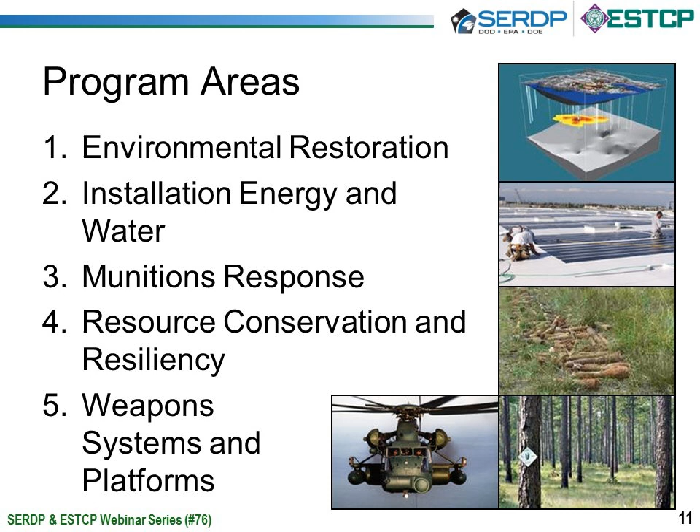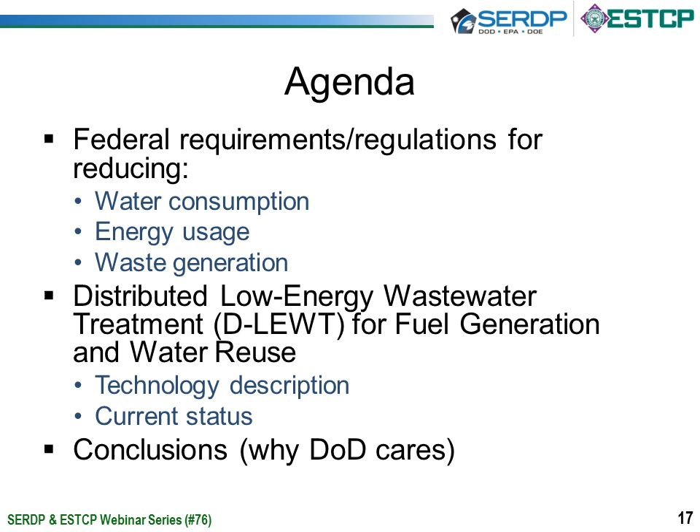However, this year, on slide 20, it was replaced with a new executive order. This new order removes a lot of the actual numerical goals, but makes it more flexible for individual agencies and installations to set their own programs to figure out how to accomplish the reduction in energy, water, and waste.

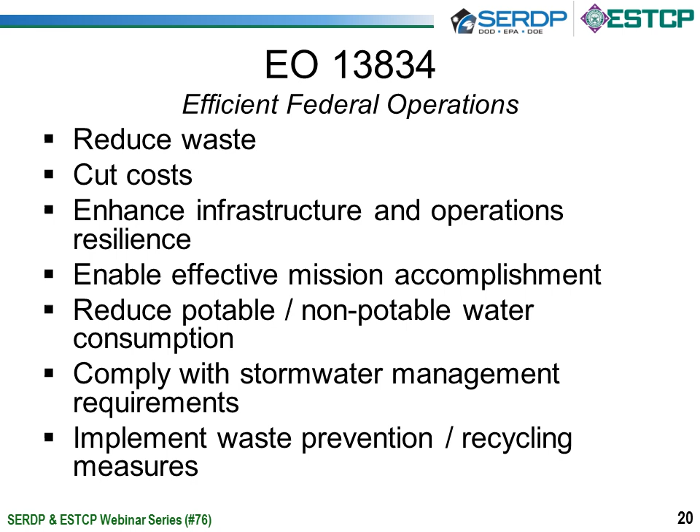On slide 21, moving into some of the Army directives. The Army directive for net zero installations addresses energy, water, and waste, focusing on reducing all of them as much as possible. One way to address energy is through renewable sources like solar and other electrical generation, but also by implementing energy recovery. A lot of focus has been on waste heat from generators, trying to use that instead of reheating water from baseline.

Water efficient technology is about reducing the amount of water used, and also about finding ways to reuse water—how can we send water from potable use, use it once, and recycle it, whether for a lower-tier use or to bring it back up to potable standard.

And then on the waste side, reducing solid waste, but also can we use the solid waste as a resource? Can we generate energy from it? Or can we turn it into another product? This way it doesn't go to the landfill.

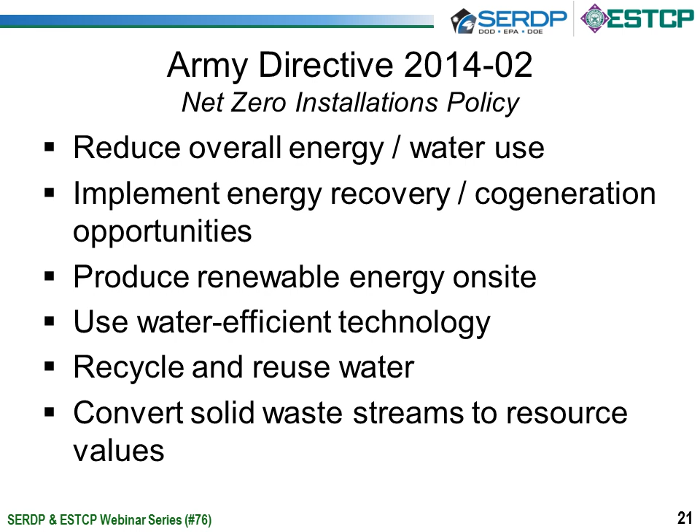In addition, for all missions and on a daily basis, the Army Directive moves the Army to having assured access to a resource, whether it's energy or water, by maintaining multiple sources, using sources that aren't typically thought of as a water source, going to more renewable energy, things that can be generated on site, and also looking at reliable infrastructure condition, maintaining what we have, fixing what's broken, and putting on-site energy and water storage, batteries, water tanks that are within the fence line so we're not dependent on the surrounding community.

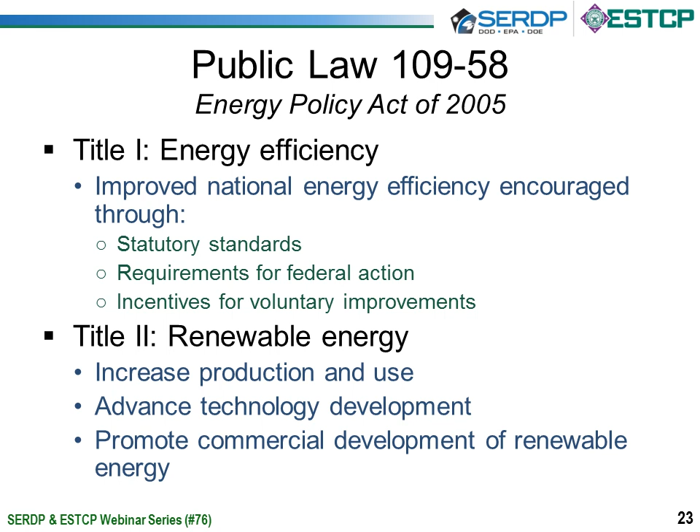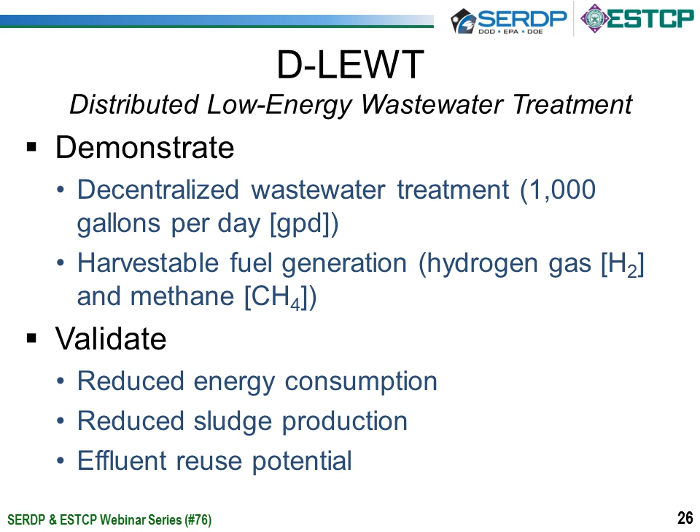On slide 27 is a pictorial representation of what I just discussed. On the left side, we have 1,000 gallons per day coming into the D-LEWT system, shipping container box. The up arrows represent the methane and hydrogen fuels that are generated. Out the right side, the effluent is water that's available for reuse. And we can take the harvestable fuels and put it back into the D-LEWT system to increase the energy efficient operation.

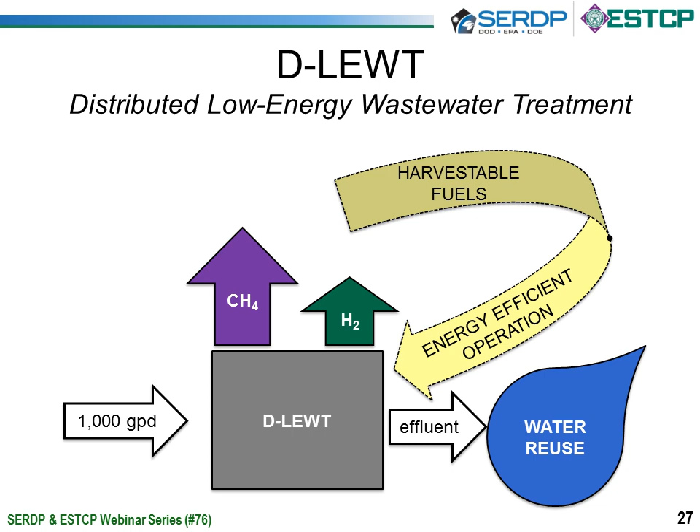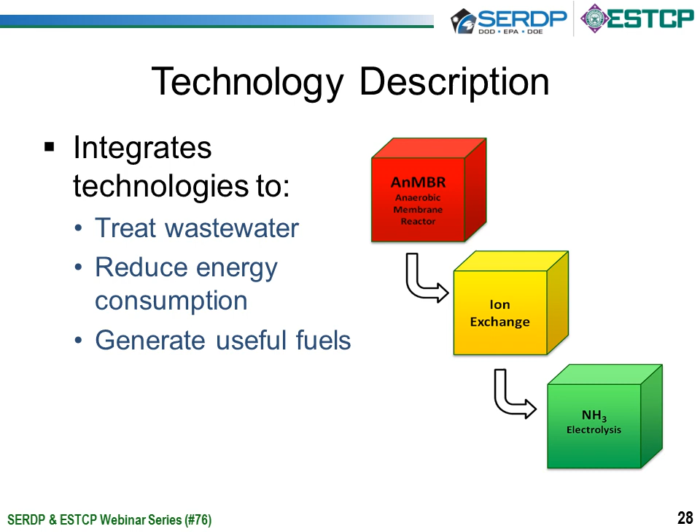On slide 29, I have a more detailed schematic of the D-LEWT system. If we walk from left to right, wastewater comes in, again goes to the AnMBR system. In here, during our project, we're going to be monitoring the volume and composition of methane gas produced.

From there, we go to clinoptilolite. Again, this is going to be to capture the ammonia. Once the water has gone through the clinoptilolite, it comes out as the effluent, the treated water, and is available for reuse. The clinoptilolite is then coupled with ammonia electrolysis for regeneration of the mineral to remove the ammonia, sending the ammonia to ammonia electrolysis on the far right.

The ammonia electrolysis cells break the ammonia into hydrogen and nitrogen gas. So nitrogen gas is our byproduct here, which being a major component of the atmosphere, it's safe to release. We keep the regenerant solution in a closed loop between the clinoptilolite and the ammonia electrolysis cells, so the regenerant doesn't become a waste product in our system.

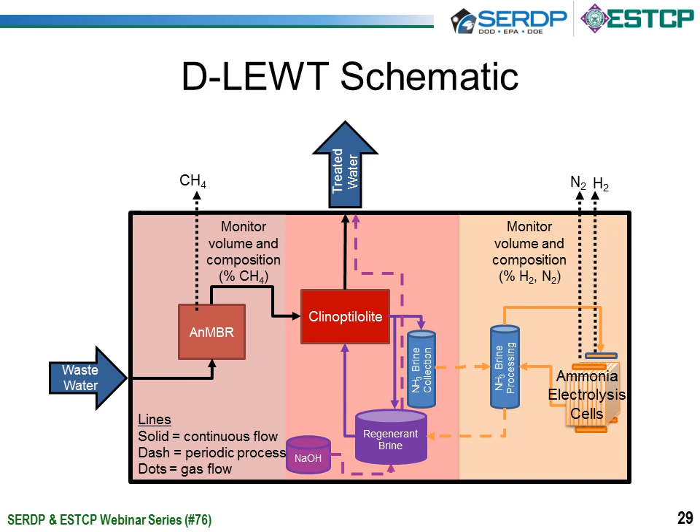On slide 30, the current status of the anaerobic membrane bioreactor. We were really lucky with some partners at the University of Illinois. They had the system available and they were willing to let us use it for the project. They've updated the controls and added a new membrane. At this point, we're ready for integration to the total D-LEWT system, pending some contract negotiations and actually getting the system built.

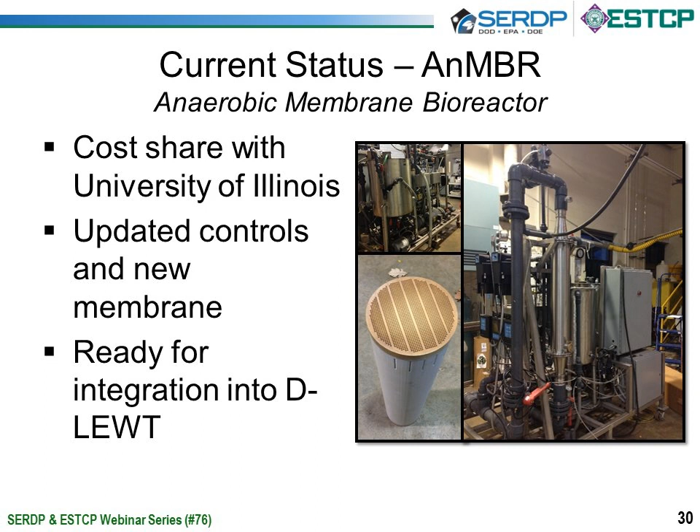On slide 31, the second step of the system is a clinoptilolite ion exchange. As I mentioned before, clinoptilolite is a naturally occurring mineral. It's mined in the U.S. and across the world. The system is nearly complete. We sent it out for an engineering firm to build it for us. We have 4 columns, similar to the one shown at the very bottom, made of clear PVC pipe. This way we can see what's going on in them.

One of the big advances is actually putting an autonomous operation in for valve positioning and timing. Currently, for the lab model, we have to have a student in there flipping switches. But for deployable operation, that's not going to work. So we're really excited to have this autonomous operation and control system.

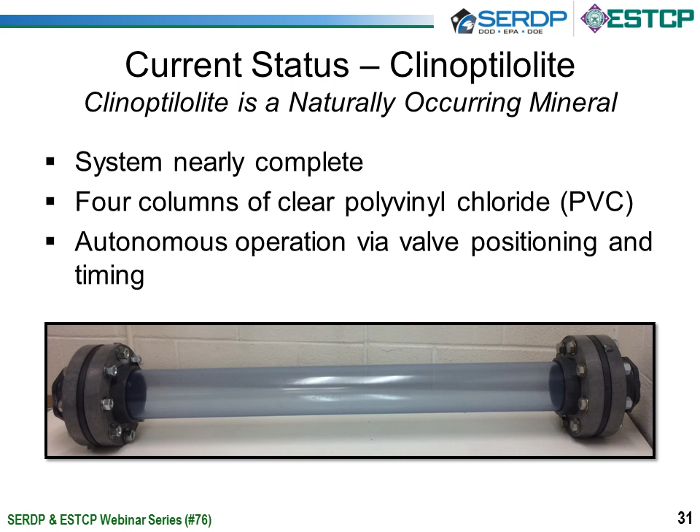On slide 32, I show a picture here of what some of the electrolysis cells look like. Between 2 of these plastic plates, there's a water-permeable membrane with catalyst on it, and that catalyst, when voltage is applied, does the work of breaking the ammonia into nitrogen and hydrogen gas. We've obtained an additional 12 cells from Ohio University. They hold a patent on this technology, and so far the only ones who are making these cells. And this portion of the D-LEWT system is also awaiting integration into the complete system.

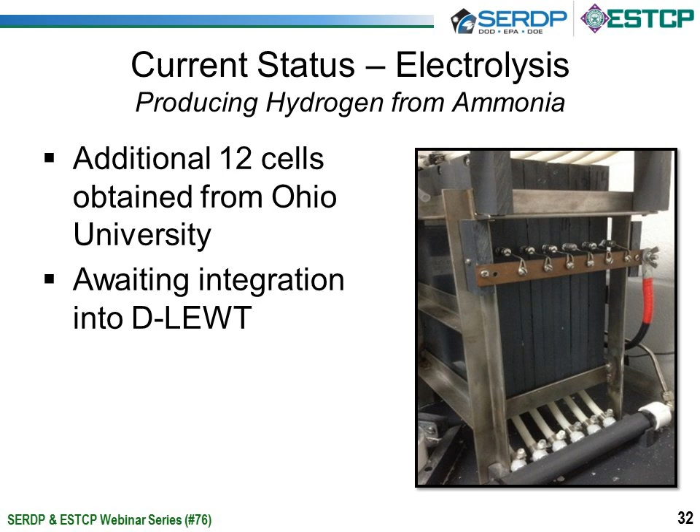Slide 33 shows where we're headed in the future. Hopefully early next year we will have our system complete and ready for deployment to Mountain Home Air Force Base. Mountain Home has been great to work with. They have a headworks building that's going to be perfect for our project. There's a grinder and pumping station right there.

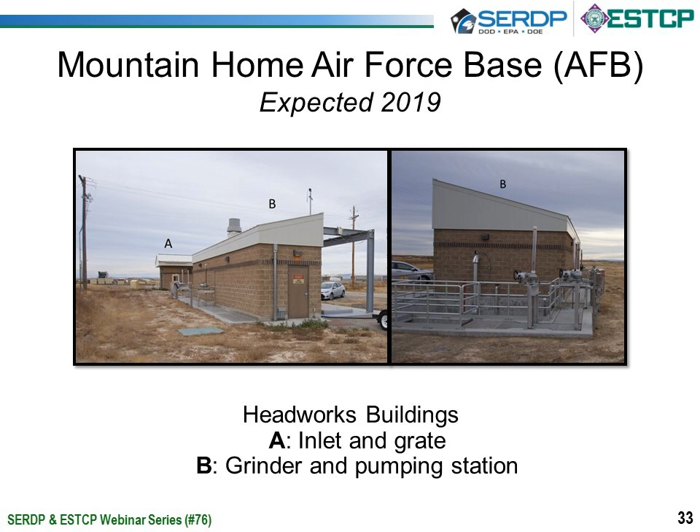On slide 34, one of the nice things about this is that we have access to an open channel from which to draw the wastewater. It's going to be post-grinder, so it'll be great to send into our anaerobic digester. We can also situate the system so we can return our effluent, the water coming out of our system, right back into Mountain Home's wastewater treatment.

This is great in case of system failure or malfunction, that we're not creating a public safety hazard. The water is going to still be treated through a standard wastewater treatment plant. And this is not going to cause a problem for them because we're not drawing enough water to impact their wastewater treatment process.

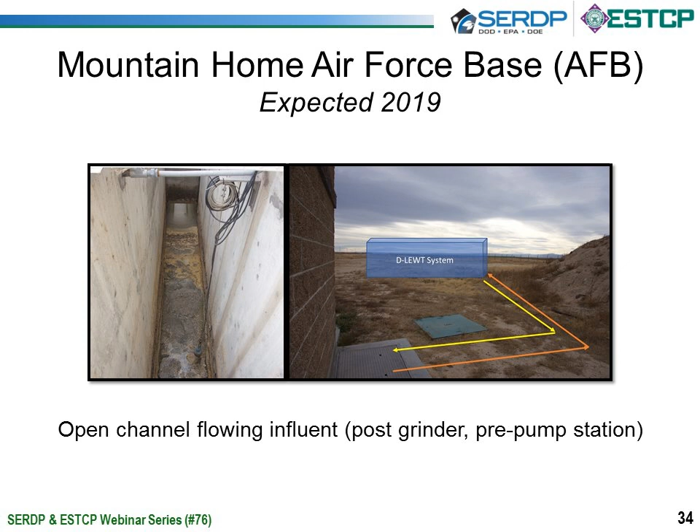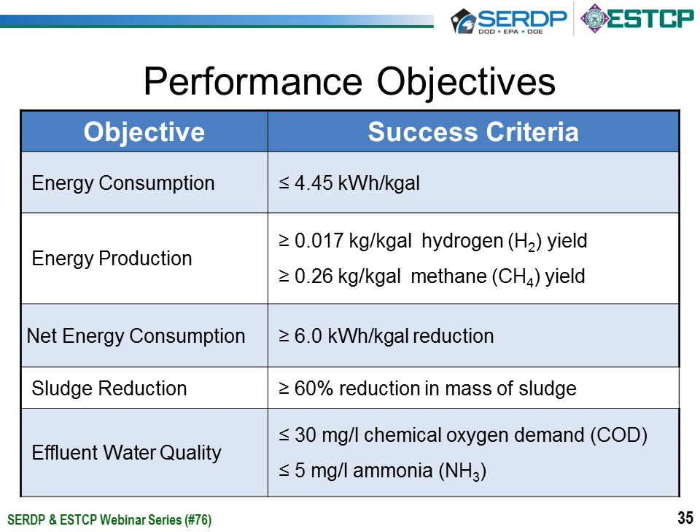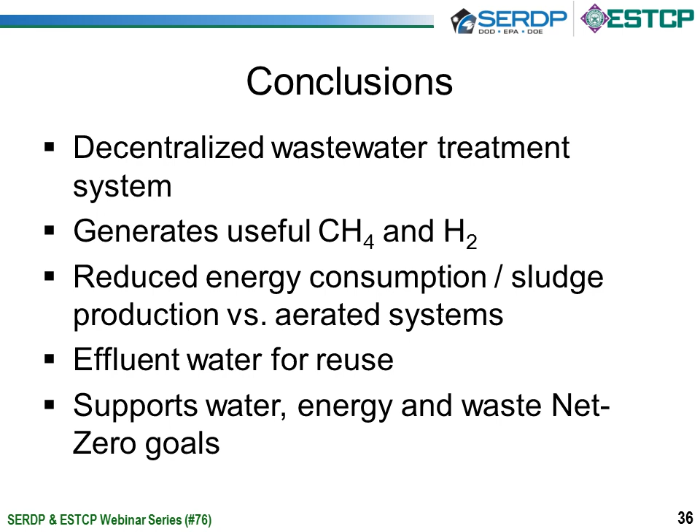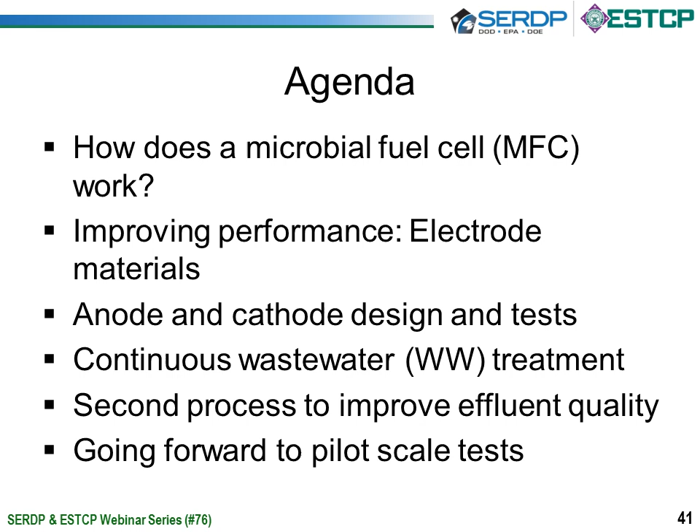So we're going to start off by talking about how a microbial fuel cell works, talk about some of the components in the microbial fuel cell and how we've researched those to determine the basis for optimizing them and being able to design and eventually manufacture them. Then getting into continuous wastewater treatment and whether we can meet our regulatory goals for treatment of wastewater and discharge. We'll talk about some secondary polishing processes, and finally get into pilot scale testing and where we're going with that.

First, a microbial fuel cell is analogous to a regular fuel cell, with the exception that we have a biological component in it. One of the components is the anode, shown right here, and we have a biofilm of bacteria that grows on this anode. At this anode, what is happening is the fuel in the wastewater situation, which is organic carbon, is being oxidized to products including carbon dioxide. When that oxidation occurs, it releases electrons.

Those electrons can then go through a load. For example, it could be used for trickle charging of batteries, cell phones, or packs on troops. From there, the electrons, of course, need to go somewhere, and they go to the cathode, just as in a regular fuel cell. In this cathode, the oxidant is oxygen, and it is reduced into water. We see here a little cube-type microbial fuel cell with the cathode shown right here. This one was developed in Bruce Logan's laboratory at Pennsylvania State University. He's the principal investigator on this project.

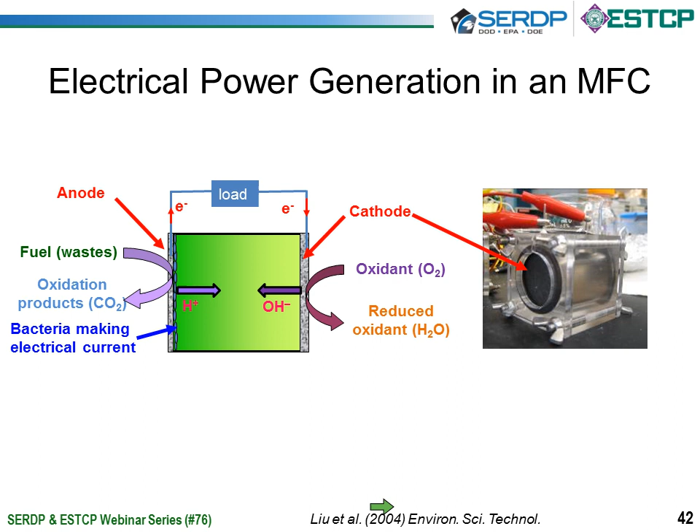So in looking at the microbial fuel cells, we looked at a number of different components. One is the anode, shown here. We need to determine how many of them we need, what size, what orientation. We also looked at the cathode, shown in red here. And then a couple other components: there's an item called the separator, which is between the anode and the cathode. The purpose of that is to protect the cathode, so we'll talk about that a little bit. And then there's a spacer.

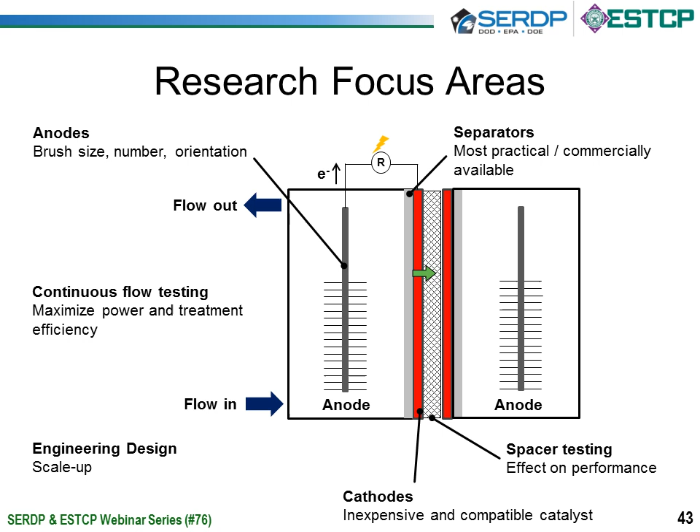We need to get air or oxygen into the cathode, but at the same time we would like to have a modular system where we're putting these microbial fuel cells back to back, very much like we'd have in a regular fuel cell, a stacked fuel cell. If we make this chamber too small, the air won't be able to get in there to provide oxygen to the cathode. So we need to research that as well. And then finally we get into our continuous flow testing and engineering scale-up.

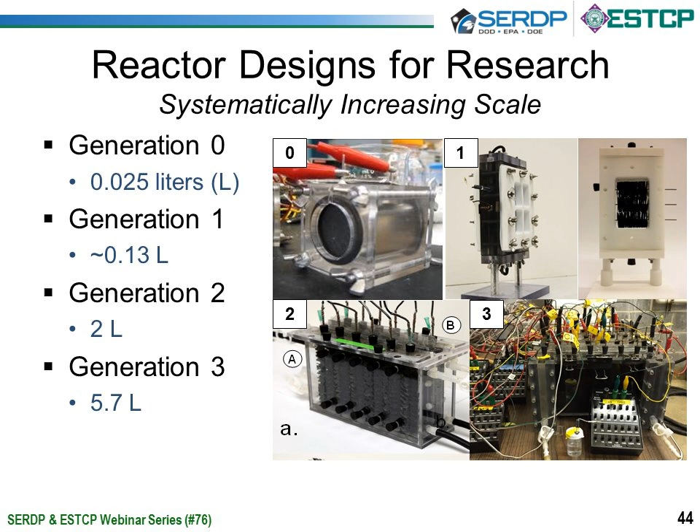So the research has been going on for many years, led by Bruce Logan at Pennsylvania State University. Through that research we've gone through a number of different generations of fuel cells, increasing in size. The idea in doing that is, while learning how these different elements work, also being able to learn what happens when you scale this up. This may sometimes be considered straight engineering, not research, but there are really a lot of very important research questions that we get into when we increase in scale. So we've systematically increased the scale, going up as shown right here.

So there are a number of questions here with these anodes. Should we have large diameter ones or small diameter ones? What's the distance between the anode and the cathode?

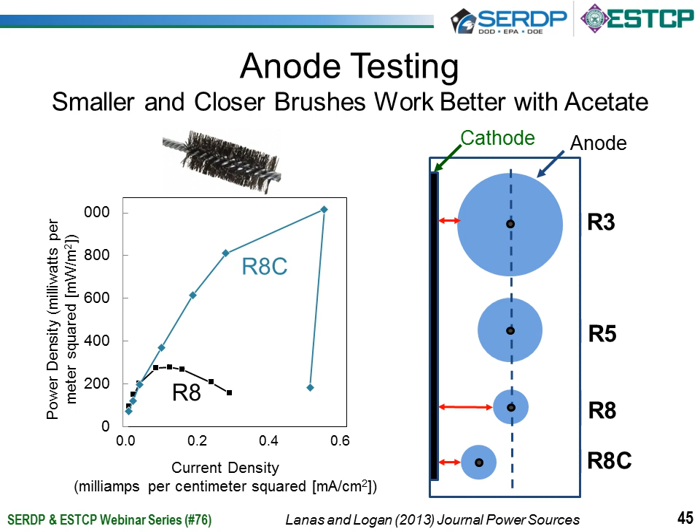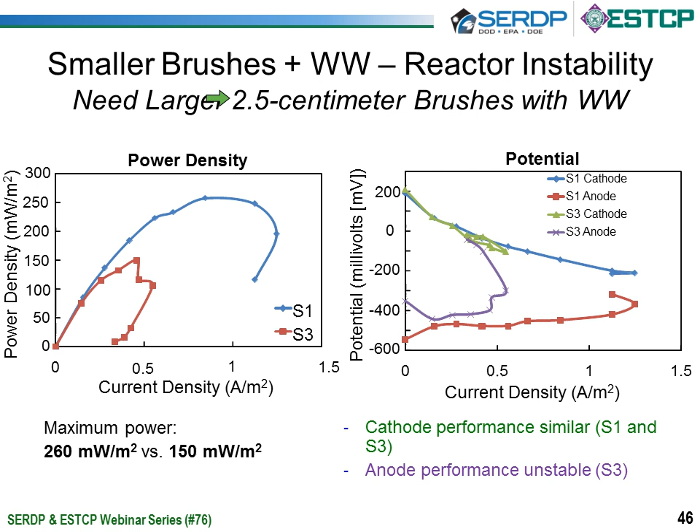So what's happening is, with these small diameter anodes in the relatively weaker and more recalcitrant wastewater, we have oxygen getting into the microbial fuel cell, and we're getting some aerobic degradation of the wastewater rather than power-producing anode-respiring degradation. So what we find is while these small diameter anodes may work fine with acetate, with real-world wastewater we need some larger diameter anode brushes, and so that's what we went with.

Let's next talk about the separator. Again, this is the sheet. It can be thought of as a woven cloth that is between the anode and the cathode. Its purpose is to protect the cathode.

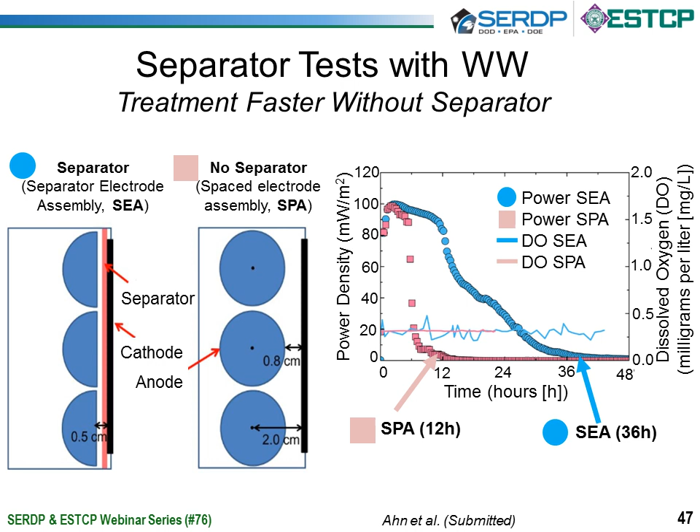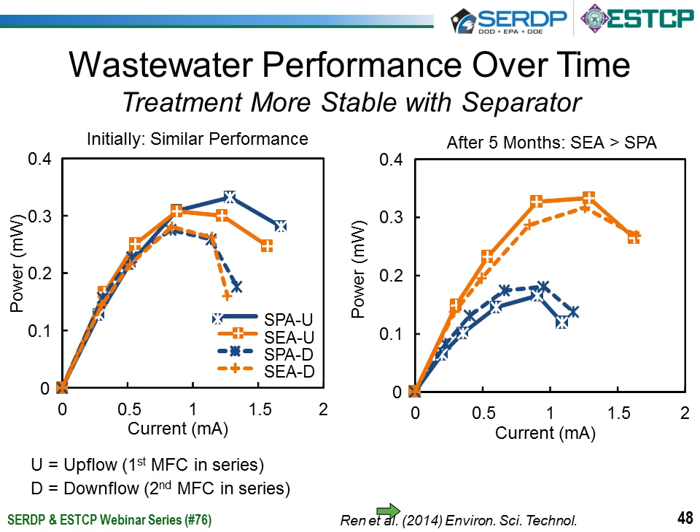So you might think from this result that not having a separator is a much better way to go. However, that's just the initial performance. If we take a look at long-term performance after 5 months, initially the results are very similar both with and without a separator. But long-term, when we have a separator, this performance is sustained, whereas if we don't have the separator, we get fouling of the cathode, which is a maintenance problem that increases our operations and maintenance costs. So we found that a separator really is critical when dealing with real wastewater, and through additional experiments not shown here, we found out the best type of separator to use.

Now the spacer. This allows oxygen to get to the cathodes, and when we have modular or stacked cells of anodes and cathodes, we'd like the spacer to be as small as possible so we decrease the entire footprint of our reactor. But we also have to have the spacer allow enough air in there so we get oxygen transfer to those cathodes. So we looked at 3 different types of materials for these spacers: a plastic mesh, a column made of plastic columns with spaces in between, and a wire type of mesh.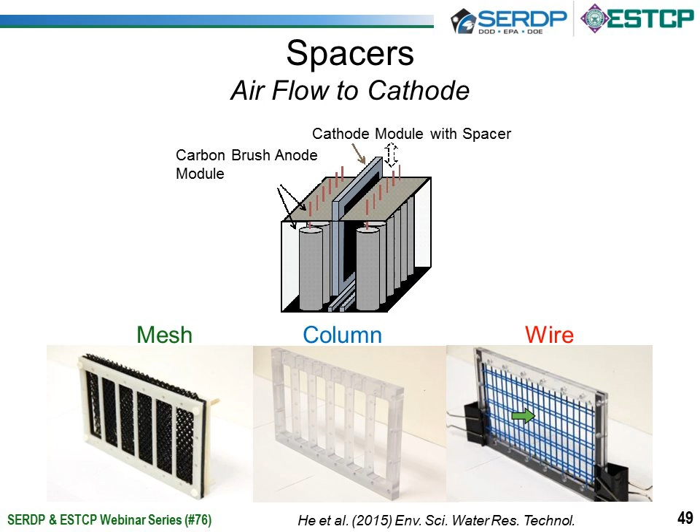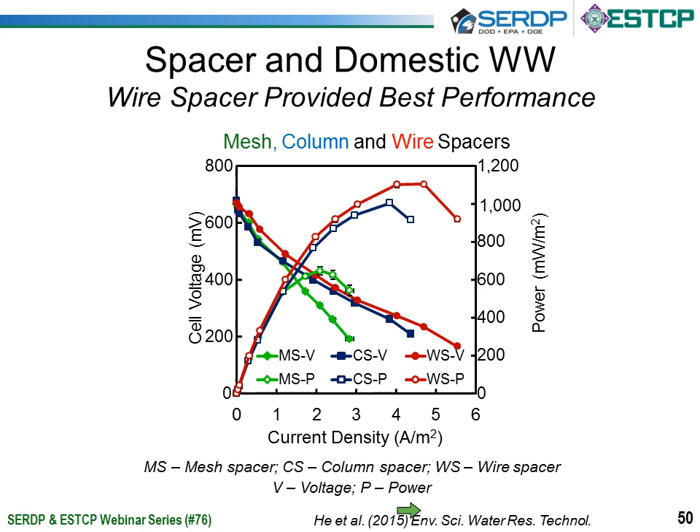I've left the cathode for last, and the reason is because in many ways it's the most complex and most expensive part of the microbial fuel cell, and has been one of the most challenging parts. Traditionally, cathodes have been made using precious metals such as platinum, which are used in traditional fuel cells. However, this has an issue with fouling. In anaerobic microbiological systems, sulfides are produced, and these sulfides can poison these precious metals. In addition, platinum is expensive and a rare resource.

So Bruce Logan and his team came up with an alternative way to use a polymer, polyvinylidene fluoride (PVDF), as a binder, and then to hold our catalyst, which was activated carbon. There was also some carbon black. They came up with a very innovative method called phase inversion, where this PVDF would be dissolved in a solvent that is also miscible with water, and then placed into a water bath. At that time, the solvent would back diffuse into the water, leaving behind a mesh of this PVDF with very high open void area, allowing oxygen mass transfer to be very good in this area. We would also have a little skin of PVDF that would be impermeable to water, so the water doesn't enter into this void airspace.

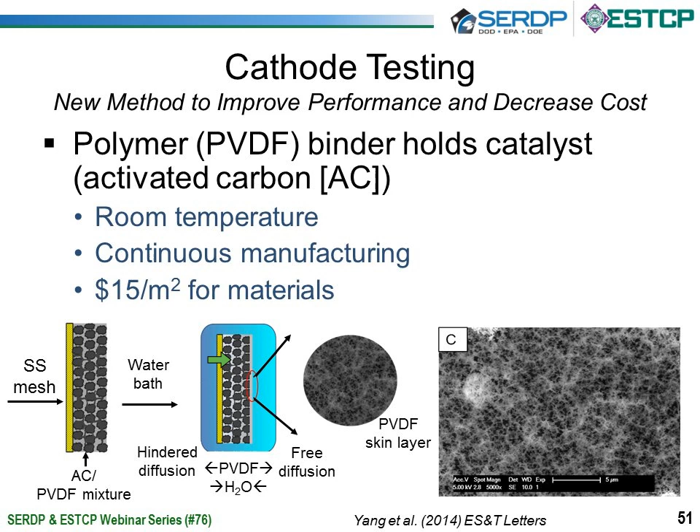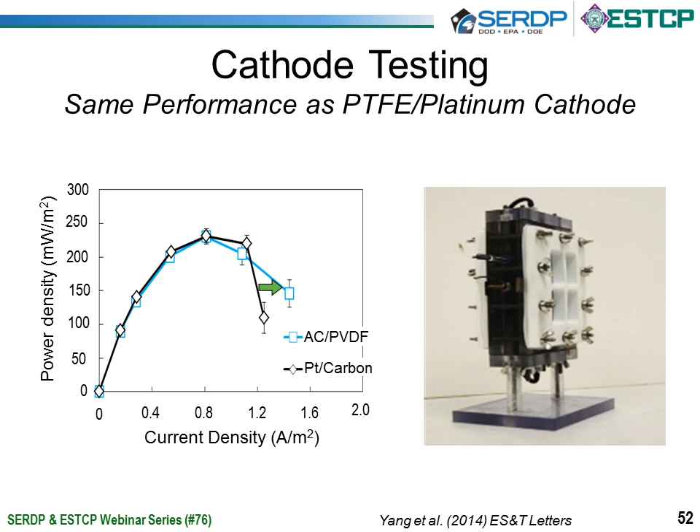So this worked quite well. If we take a look at the performance, we find out it's very similar. Here's the performance for the traditional platinum cathode, and here's the performance for this innovative cathode. So this worked quite well.

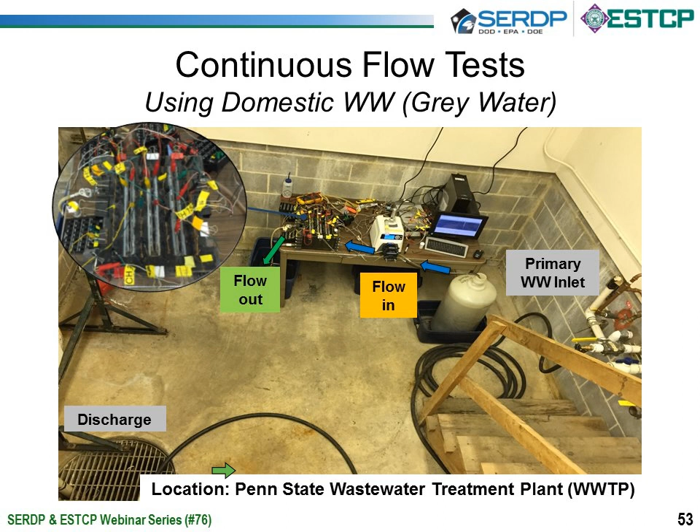Here you can see there are 3 sets of cathode spacer cassettes, and then the anodes are on all sides of these. If we take a look a little closer, we can see this size, and then we would have multiple of these units.

In certain experiments, we were able to get over 80-90% removal, though those data aren't shown here. But in addition to this increasing dependence on hydraulic retention time, we would see a leveling off of the performance as well. This is a potential issue in terms of being able to get to good effluent quality. It suggests we may need a polishing step downstream of the microbial fuel cell.

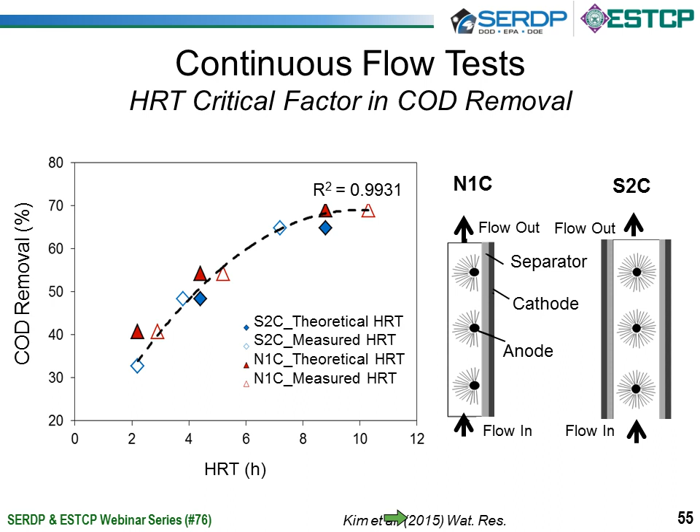But the other aspect of it is in terms of power. What we're trying to do here, in addition to treating the wastewater, is to treat it in a sustainable fashion where we are recovering energy from that wastewater and getting to energy neutral or energy positive performance.

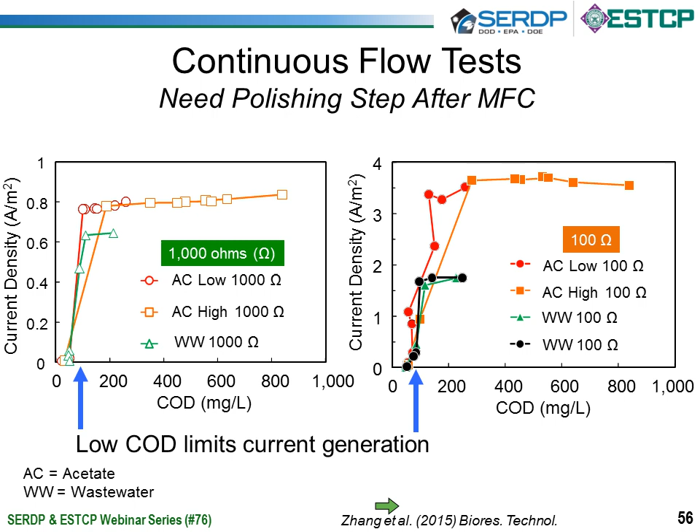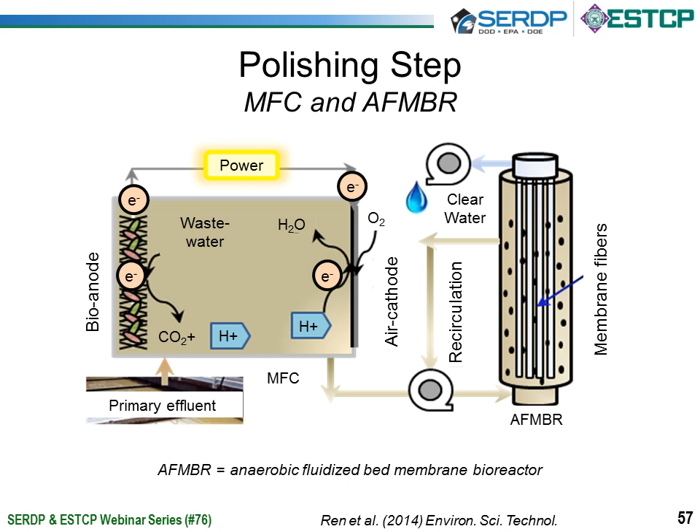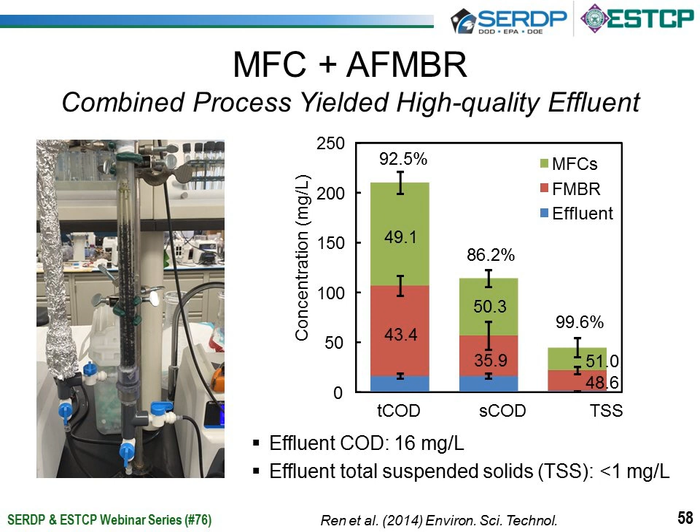In addition, we are filtering that sludge, so we don't need a large clarifier to remove it, and we get high quality water with very good performance, as we'll see in this next slide. Here's a picture of that anaerobic fluidized membrane bioreactor. About 50% of the COD was removed by the membrane microbial fuel cell, whether total COD or soluble. The remainder, with the exception of about 16 milligrams per liter in the permeate, was removed by this polishing step. Total suspended solids were very low, as you'd expect in an ultrafiltration process.

So as I hope you've seen, we've learned a lot from these different components of the microbial fuel cells in terms of how to capture energy efficiently and effectively treat the organics in the wastewater. How do we scale that up then?

We go back to our traditional chemical and environmental engineering principles, and say let's look at plug flow to maximize our first order kinetics. We can put our cathode in a space where we use these also as baffles, and our anodes here, so we're getting this plug flow operation while also minimizing short circuiting. But in addition, we want this to be modular, so we can mass produce it and make it economical. It needs to be scalable.

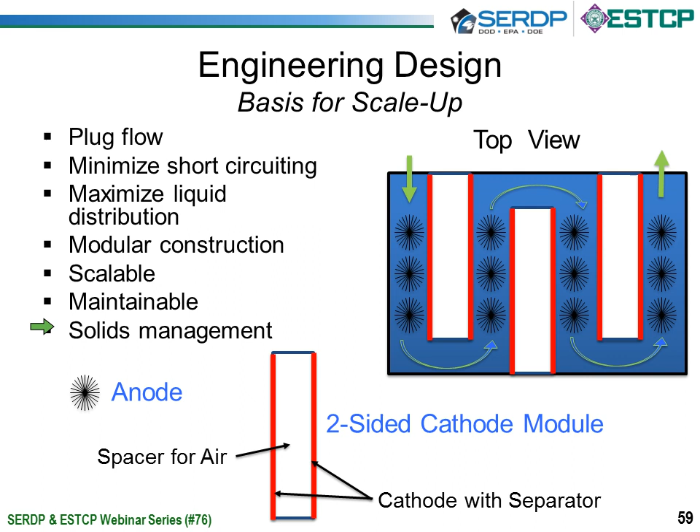And then a key part is we need to be able to maintain it, especially at a forward operating base, where we can't have our soldiers spending all their time cleaning our anodes and cathodes. We need to make it easily maintainable.

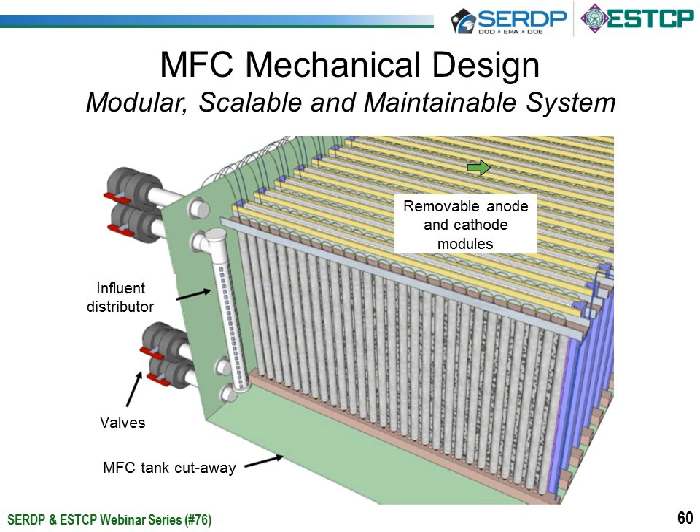So here is a preliminary design showing cassettes where we have a series of anodes, and these cassettes can easily be removed and replaced with new cassettes. The cathode cassettes are shown right here. And this is the process we're going forward with in terms of pilot testing this.

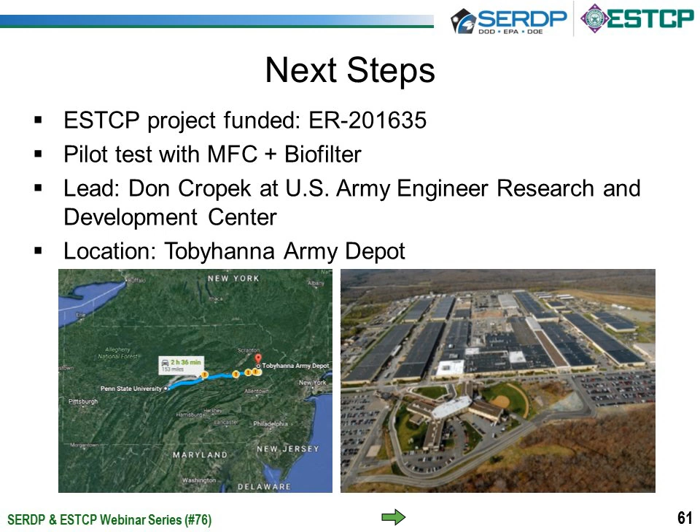Speaking of pilot testing, the research I've shown you was funded under SERDP. This new project is funded under ESTCP. Don Cropek with the U.S. Army is leading this, and Martin Page with the Army is also a very important part of this. This demonstration will be done at Tobyhanna Army Depot in Pennsylvania, close to Pennsylvania State University, so Dr. Logan's postdocs don't have to travel too much.

And in that, we'll be using a biofilter downstream of that microbial fuel cell. So to conclude, we've been able to demonstrate that we can get energy neutral or energy positive power production with a microbial fuel cell. We are getting a little bit of energy being produced, 0.08 kilowatt hours per cubic meter of water treated. To put that into perspective, activated sludge or extended aeration, an oxidation ditch, deals more with consumption of 0.6 kilowatt hours per cubic meter of wastewater treatment.

And if you look at the energy consumption for water treatment and wastewater treatment in the United States, it's about 2 to 4% of the nation's electricity demand. So it's not a small amount, and we must consider that. If we can get to energy neutral, and even better, energy positive performance in treating our wastewater, this is good. And what we're doing is looking at converting these wastewater treatment plants into wastewater resource recovery facilities.

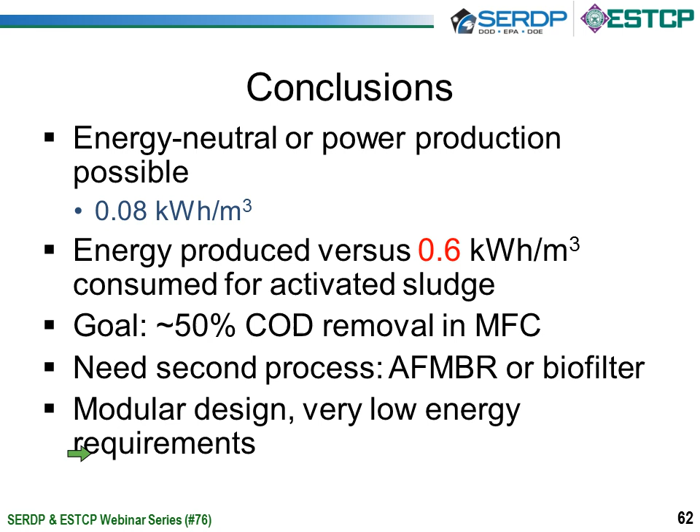The goal: we can easily get 50% COD removal, likely better than that, but we have to determine that we do need a secondary process, an AFMBR or a biofilter, and we can get to modular designs with this.

I want to acknowledge Bruce Logan, the PI on this project, and also Josh Goldman with CDM Smith, who did a lot of the engineering design on this project. For additional information, you can see the project right here, the 2216, which is the SERDP project, and my contact information is right here.

Thank you very much, and I'll be happy to entertain any questions.